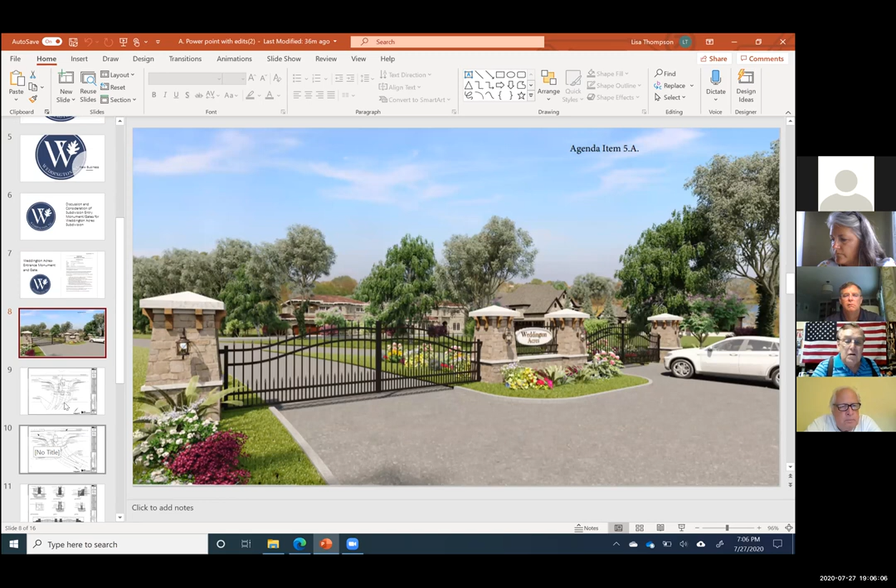Next slide is a conceptual sketch of what it would look like. And then you have your site layout and your details of the column and the sign.

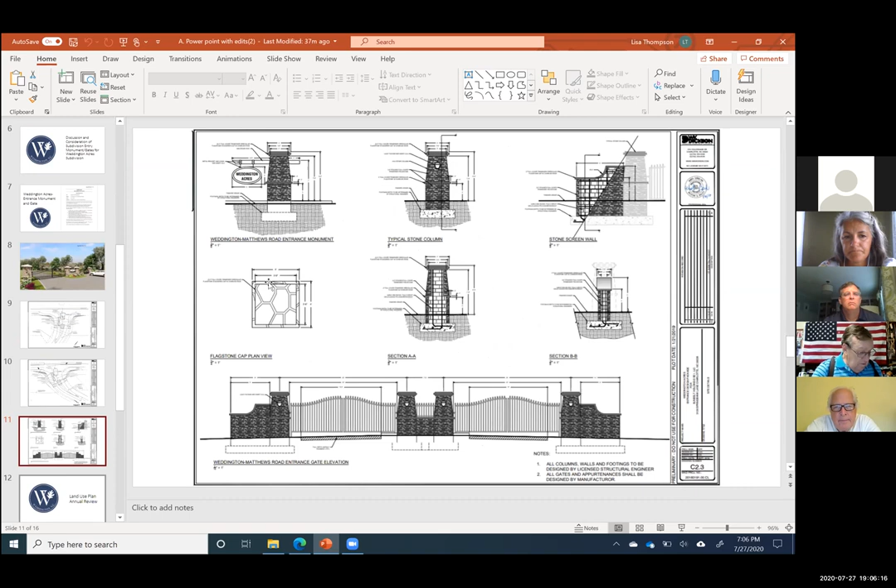Okay, Lisa, can you go to screens 9 and 10, please? So 9 is which road, Antioch Church or is that? This is the other, Weddington Matthews Road. Slide 10 is Antioch Church Road. Okay, so can you go back to screen 9, please?

From a review standpoint, if someone from WK Dixon can respond a little bit about this, in looking at this particular piece, I think we had a different drawing submitted once before. Is this the latest and greatest drawing that we have? Yes, this is the latest and greatest. Lisa had forwarded over the previous plans that y'all were looking at.

Just to confirm, y'all can hear me, right? Yes, we can hear you. Okay, sounds good. Lisa did forward me over the previous plans that y'all were looking at, and those were before the roads were turned to private roadways, so they show curb, gutter and sidewalk on them. And then those are also before the deceleration lane on Weddington Matthews Road and the right turn lane on Antioch Church Road were added.

So the drawing indicates a distance of about, I can't enlarge the screen so bear with me here, about 24 feet between center column to center column on the entry gate. Is that correct? Hold on one second, let me pull our stuff up. At the entrance gate, yes, this is on the main gate on the entrance gate on Weddington Matthews Road. So we got 18 foot between gates and inside the columns.

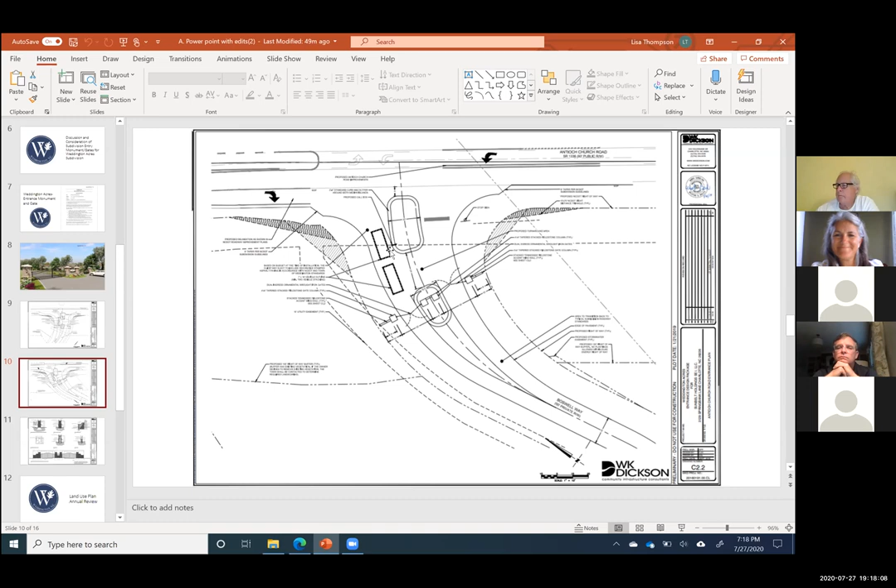Lisa, can you remind me what approvals we have already? Because I thought we had brought this earlier, and this is on me. I know probably all y'all realize this project's been going on for way too long at this point. But did we bring this to planning board already once? And does the planning board have the final approval, or do we have to go to construction?

The planning board has final approvals for gates and monuments. The construction plans came through along with the preliminary plat, but I don't know if they've seen this detail.

And then when you guys did the private road approval, that's when they saw it through that private road approval. But back then we had that other exhibit with the turnaround truck and the wider lanes, and that's when it was curb and gutter.

So what I'm hearing is we need 10 more feet to make this approvable. I'm saying at least that, yeah. Because right now your stack up methodology is really only 2 cars, particularly on the Weddington Matthews Road entrance.

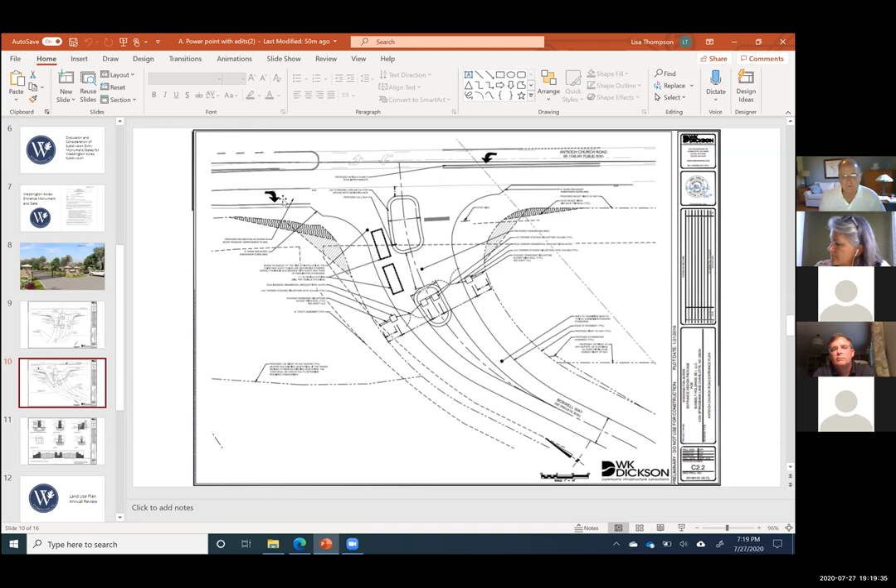I mean, the way that turn lane, that right-hand turn lane, almost becomes immaterial because of the location of the call box. You're going to be having to swing out pretty far in order to make that turn, not on this one, but on Weddington Matthews. If you look at that, most of this turn lane is not going to be used because of where the call box is located.

So, on this road, on this entrance in particular, the call box really needs to move in a good 10 feet more if you can accommodate it, to make sure you're not stacking vehicles up onto a major thoroughfare. Okay, yeah.

So do we want to table this discussion and do a review for a different drawing? Yeah, it's a good idea.

Lisa Thompson, do you have a comment along those lines? Up to you. You have the ability to conditionally approve it with the lane and the 3 cars. I would rather see the drawings again, in all honesty. I would too. There's a lot of safety issue here. I think the board probably needs to see a revised drawing before that.

This is a bad piece of property with the 2 roads, just like they are right now. We've always been concerned about these two particular issues.

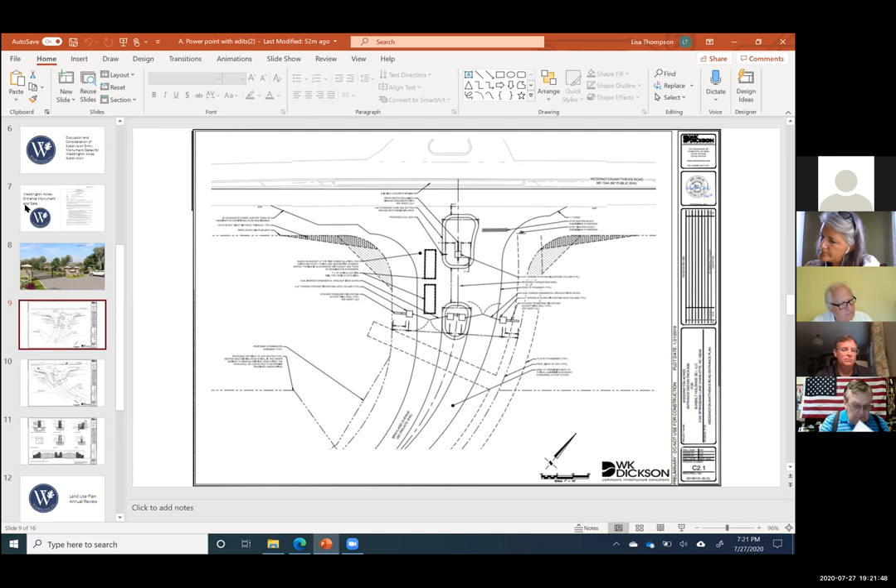I'm trying to find my memo here. I hadn't printed out all the things. Lisa, I'll call you tomorrow and we can discuss this a little bit further about what may or may not work out. Is that all right? Sounds good.

And what's next on the agenda? The review? Yes, sir. Okay.